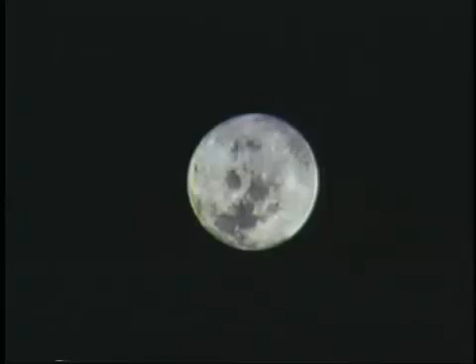The Moon, our only satellite. Barren and void of oxygen and life, where temperatures on its surface range from a blistering 230 degrees Fahrenheit to a frozen minus 290 degrees at night. Here, there is no weather, no wind. It is serene, still, unchanged for millions of years.

Beyond it, the Earth, surrounded by a thin gaseous layer, its surface often remains hidden beneath the ever-changing veil of clouds. This layer of gases protects the Earth from harmful solar radiation, limits the temperature extremes, and contains the weather that scars and molds the features of its surface.

On Earth, there is never such a thing as no weather, and the rate at which our atmospheric conditions change can be dramatic. As pilots, we must become attuned to the atmosphere and the weather it contains. Since the air is our medium of movement, understanding weather phenomena and the forces behind them are important considerations.

The atmosphere that surrounds the Earth is relatively thin. Although it extends several hundred thousand feet into space, about half of the total atmosphere is compressed below 3.5 miles. Many people have the false impression that the atmosphere is mostly comprised of oxygen, but in reality, only 21% of the total gas is oxygen.

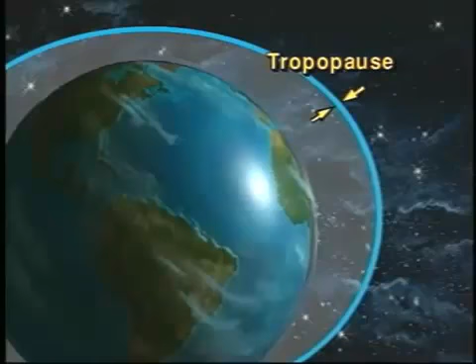Above the troposphere is a thin layer known as the tropopause, which acts as a lid on the troposphere, keeping most of the moisture within the layer below. The stratosphere extends to about 22 miles above the surface. The air within this layer is very dry and stable. Few cloud formations penetrate into this layer.

Above the stratosphere are the mesosphere and the thermosphere. These layers have very little effect on the weather.

The gases in the atmosphere contain molecules that are constantly in motion. As the air is heated, these molecules speed up, creating more space between them. The result is fewer molecules per given volume of air. When the air is cooled, the molecules become less active, meaning more can exist in a given volume of air. This cooler air is heavier and denser than the warmer air. The differences in air density are the basis for the movement and circulation of the atmosphere.

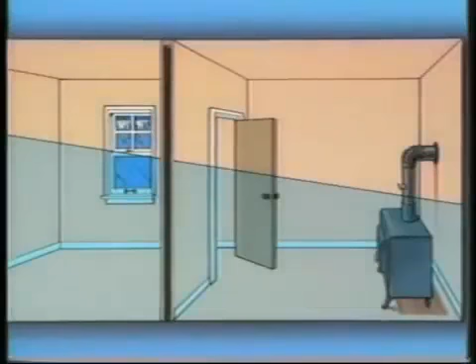To demonstrate this principle, suppose we have two rooms, one which contains cold, dense air, while the other has warmer, lighter air. When the door is opened, the air begins to mix. The heavier, colder air slides under the warmer air, creating a cold draft on the floor. As the cold air fills the bottom of the room, the warmer air replaces the colder air. On a larger scale, the draft created between the rooms is called wind.

Air replacement due to these density changes drives our major weather systems. This density difference is due to the pattern of global heating.

At the equator, light from the sun strikes the surface at an almost perpendicular angle. Near the poles, the surface of the Earth is largely turned sideways to the sun. This results in more atmosphere between the sun and the Earth at the poles. This greater amount of atmosphere cuts down the intensity of the sun's rays. Also, the same amount of light that would cover a given area on the equator is distributed over a far larger area at the poles. The result is less heating energy per square mile.

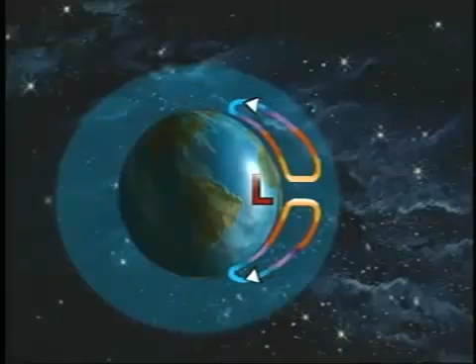As the sun's radiation heats the tropical areas of the Earth, the air becomes less dense and rises. Because less dense air does not exert as much pressure, a permanent low-pressure area forms near the equator. Nearing the top of the troposphere, the warm air is displaced sideways, away from the equator. The air continues northward and southward, slowly becoming cooler until it begins to descend near the poles. This colder descending air creates a permanent high-pressure area near the poles. The air then returns along the surface, back toward the equatorial areas, to replace the rising air.

If the Earth didn't rotate, there would be a continuous circulation pattern from the polar highs to the equatorial low. But because it does, this theoretical one-cell circulation pattern becomes a three-cell pattern. In this circulation pattern, the air near the equator still rises and flows toward the pole. But this branch, known as the Hadley cell, only reaches about 30 degrees north. Here it combines with sinking air from the Ferrel cell that corresponds with a semi-permanent subtropical high-pressure area.

Near 60 degrees north, the warm surface winds of the Ferrel cell and the cold winds of the polar cell collide, rising to produce an area of low pressure. In addition, these airflow patterns are affected by Coriolis force.

In order to better explain how Coriolis works, let's use the example of two ball players attempting to play catch on a merry-go-round. As the pitcher throws the ball, it travels in a straight line, but not to the catcher. To the thrower's perspective, some force seems to be turning the ball to the right.

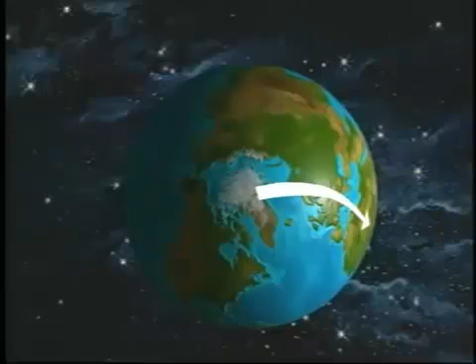This same situation applies to air as it flows from the North Pole to the equator. Because of the Earth's rotation, the wind seems to be deflected to the right. This apparent rotation is called Coriolis force.

Atmospheric pressure, or the concentration of air molecules over a given area, is measured in terms of inches of mercury, or millibars. 1 inch of mercury is equivalent to approximately 34 millibars. The measurement of pressure is done with the use of a barometer.

This instrument is nothing more than a partial vacuum within a glass tube containing mercury. As the pressure of the air exerts a force on the container of mercury, the mercury will rise. The average atmospheric pressure of the Earth will make the mercury rise 1,013.2 millibars, or 29.92 inches. This measurement is considered to be standard pressure.

During periods of higher atmospheric pressure, the force exerted upon the mercury is greater, which forces the mercury to rise. The reverse happens during periods of lower than standard pressure.

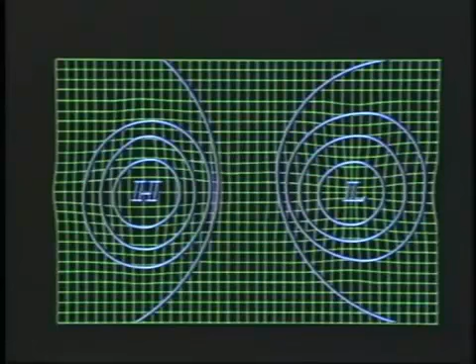As we rotate the image to a top view, we can draw lines around the areas that appear to have the same height, or in this case, the same amount of atmospheric pressure. These lines are called isobars, and they are drawn on weather maps to represent areas of equal pressure. By using these lines, you can determine the position of high and low pressure areas. You can also tell how large or severe they are by the number of lines and how they are placed.

Notice how the isobars are closest together directly between the high and the low. The closer the lines, the stronger the pressure gradient.

Air from a high-pressure area will flow directly toward a low with a force which relates to the pressure gradient. If the Earth didn't rotate, highs and lows would exchange wind directly in this manner. However, Coriolis force from the rotation of the Earth is also acting on these systems.

As winds spill off a high-pressure area in the northern hemisphere, they are deflected to the right. This results in a clockwise flow around a high and a counterclockwise flow around a low.

As the wind is driven around these systems, the air closest to the surface is slowed by the friction of the ground. When this happens, the Coriolis force is diminished until the pressure gradient force becomes greater. The resulting wind tends to flow across the isobars toward areas of lower pressure.

At altitude where airflow is not affected by the surface friction, the wind continues to flow parallel to the isobars.

In addition to creating large patterns of wind around highs and lows, differences in atmospheric density can cause wind flow on a local level as well.

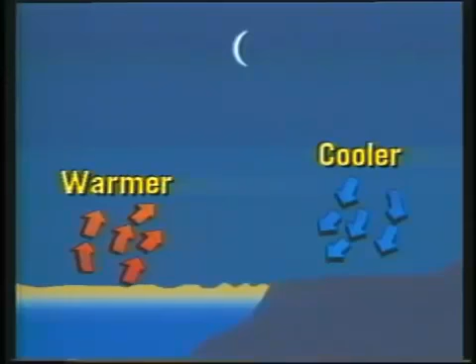During the night, the land cools very quickly. The air above the landmass begins to cool and sink. The ocean, now warmer than the land, begins to warm the air above it, causing the air to rise. The flow of the cycle now reverses, and in the evening, a land breeze will be experienced.

Local wind patterns can also form as the result of mountainous terrain. One of these is a foehn wind, which occurs when there is a mass of cold, dense air near the top of a mountain range.

As the air pushes over the top of the range, the cold air begins to descend down the other side. As this air accelerates and replaces the warmer air beneath it, it begins to compress and warm up. As the air heats, it will eventually become warmer than the air it is replacing. This causes the atmosphere at the bottom of the hill to become warmer.

These winds can become very strong, with gusts exceeding 120 miles per hour. In the Rocky Mountains, they are called Chinooks. In the Sierra Nevada mountains, they are the Santa Ana winds.

Regardless of their names, these winds can produce large amounts of damage and are hazardous to aircraft, both in the air and on the ground. They can occur during what would normally be perfectly good VFR weather, and is one of the reasons surface wind reports are important to you when receiving a weather briefing.

We have seen how heating and the differences in air density can produce wind. The other major force in the formation of weather is moisture. Moisture occurs on our planet as a solid, a liquid, and a gas. Within these states, it can take many forms.

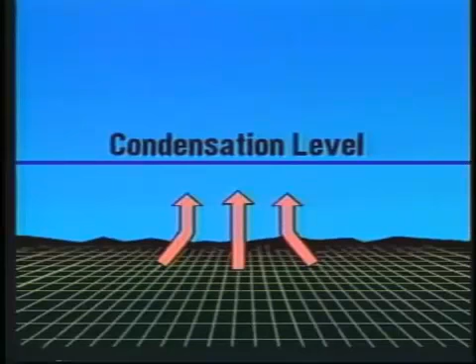Originally, the air begins to rise through a force such as the sun heating the surface, which in turn warms the air above it. As this warm air cools and eventually condenses, the latent heat released from condensation will, under the right conditions, continue or increase the strength of the updraft. If this process continues, a thunderstorm can develop.

In vapor form, molecules of water exist between other molecules contained in the atmosphere. When the air is warm, more room exists between the molecules of air. Therefore, more water molecules can squeeze between the air molecules. When the air is colder and the air molecules are closer together, less water vapor can fit between the already close air molecules. For this reason, cold air cannot hold as much water as warmer air.

Dew point is the temperature at which an air mass becomes completely saturated with water vapor. In other words, it will hold as much water as the temperature will allow. When an air mass becomes completely saturated, condensation occurs.

Let's say that we have an air mass with a temperature of 55 degrees Fahrenheit. If the dew point is also 55 degrees, then the air is 100% saturated. If condensation nuclei are present, then condensation will occur.

Clouds, fog, and dew are all forms of condensation. When water that is formed on the condensation nuclei becomes too heavy for the atmosphere to support, then precipitation occurs.

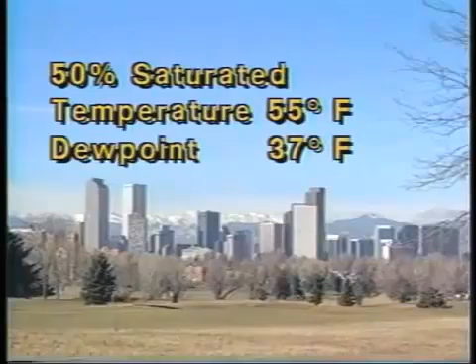Since the moisture content in an air mass is relatively constant, the air mass must usually undergo some form of cooling in order for condensation to occur. For example, if the air is 50% saturated at 55 degrees, then the air must be cooled to about 37 degrees in order for condensation to occur. When the temperature reaches 37 degrees, this air mass will be 100% saturated.

Weather is something that we must deal with daily as pilots. It is constantly changing and infinitely complex. Knowing the basic driving and manipulating forces of our Earth's weather patterns will help you to understand the more detailed conditions and concepts that will be introduced in the following weather sections. Being able to understand the concepts of weather development will not only help you understand the current conditions, but will also help you anticipate future changes as well.

It looks like it's going to be a cold one today. An Arctic cold front moved into our area around 3 this morning and has already dropped 3 to 4 inches in some parts of the city. The air mass associated with this front is stable, and with all the moisture being pushed up from the Gulf, we're in for snow the rest of the day and possibly tomorrow.

Every day, all over the world, people are dealing with the effects of the weather. In the previous section, we saw how the forces of air density, Coriolis, temperature, and moisture worked independently of each other. In this section, you'll see how they interact to produce the weather phenomena we see every day.

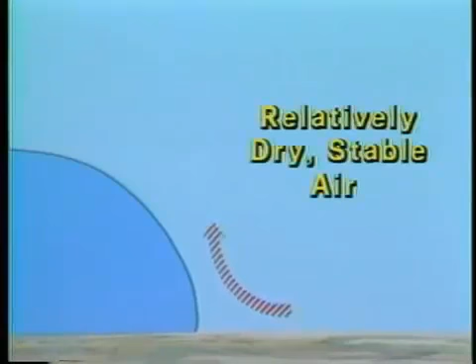As a cold front moves, it replaces warmer air at the surface. Since colder air is denser, it pushes the warmer air aloft. If this warmer air is relatively dry and stable, stratiform clouds form in the vicinity of the advancing cold front. If the warmer air is relatively moist and unstable, cumuliform clouds may form along the front.

A rapidly moving cold front can create thunderstorms many miles ahead of the frontal boundary. A line of these thunderstorms parallel to the front is called a squall line and can contain violent weather. The thunderstorms in a squall line can grow to 65,000 feet and can be especially violent. These storms often produce heavy rain, large hail, and even tornadoes.

In contrast to a fast-moving front, the slope of a slow-moving cold front is not as steep and the lifting action is not as great. Therefore, the weather is less severe.

When a warmer air mass overtakes a colder one, a warm front exists. Because of the difference in relative densities, the warm air will slowly slide over the colder air. This can result in very little vertical air movement. If enough moisture is present and the warmer air mass is relatively stable, stratiform clouds usually form. These clouds may extend for many miles ahead of the front.

However, there may be some cumulus clouds present in the form of embedded thunderstorms if unstable air is present. The weather associated with a warm front usually includes low ceilings, fog, and a subsequent reduction in visibility.

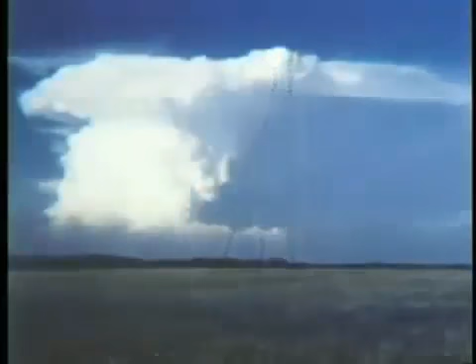The dissipating stage begins when the cell becomes predominantly downdrafts. During this stage, the intensity of the precipitation decreases. It is also during this stage that the upper-level winds often blow the top of the cloud downwind, giving it an anvil appearance. However, this does not necessarily mean that the storm is over. Severe weather could continue well after the anvil forms.

While thunderstorms usually have similar physical features, they can differ in intensity, degree of development, and associated weather. Lightning is one of the weather hazards that always accompanies thunderstorms. Other hazards might include heavy rain, hail, turbulence and gusty surface winds, and even tornadoes.

As you gain experience, you'll learn how weather limits your flying. But regardless of your experience, you should always avoid intentionally flying into or near thunderstorms. To do this, you must know where they exist or are likely to develop. You can determine this by checking weather reports and forecasts prior to departure and during your flight. If widespread thunderstorms are being reported, you might find it necessary to delay or cancel your flight.

If you encounter thunderstorms while airborne, you should never attempt to fly over them. These clouds can build faster than your airplane is capable of climbing. Flying below the cloud can be just as hazardous because of the extreme turbulence produced by the downdrafts. And you shouldn't try to fly around a thunderstorm unless you can maintain at least 20 miles between it and yourself. If that isn't possible, it might become necessary to turn around or fly to an alternate and wait for the storm to pass.

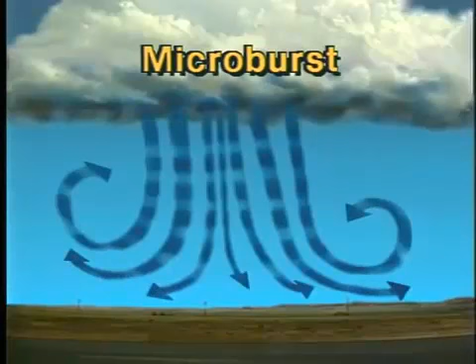One form of turbulence, called wind shear, is a sudden shift in wind speed or direction. It can occur at any altitude and in a vertical or horizontal plane. Wind shear is often associated with a more serious phenomenon called microburst. A microburst is an intense, localized downdraft which descends from the base of a convective cloud. As the air reaches the surface, it spreads out in all directions, often forming in a circular motion. This circulation creates an area of severe horizontal and vertical wind shear. A wind shear is particularly dangerous when it's in the proximity of an airport.

To show you what can happen, suppose you're taking off into a microburst. You would initially experience a headwind and an increase in performance. When the aircraft reaches the point where the wind shears to a tailwind, it experiences a severe decrease in performance, which could lead to disastrous results.

Some airports are equipped with a low-level wind shear alert system, which allows controllers to advise you of significant wind differences on the field. Whether or not this system is available, any time a thunderstorm is in the vicinity, you should anticipate the presence of a microburst. While most microbursts are associated with heavy precipitation, moisture does not have to be present.

They sometimes occur in virga, or streamers of precipitation that trail behind clouds and evaporate before reaching the ground. If there is no precipitation, a ring of dust on the ground, or trees being blown in different directions may be your only indications. Do not take off or land at an airport when you suspect a microburst exists. If you are in the air, delay your landing or divert to another airport. Most microbursts will pass over an area within a few minutes.

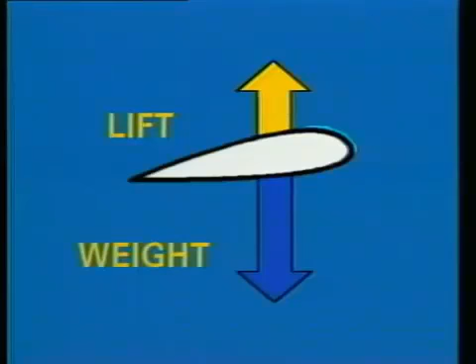Another weather hazard you should be familiar with is structural icing. Since it occurs only in visible moisture when the aircraft's surface is at or below freezing, you're unlikely to encounter structural icing until you're instrument rated. The major reason icing is dangerous is because it changes the shape of the airfoil and destroys its lift. It can also increase the weight of the airplane and restrict control movements.

Frost is a related element that you are more likely to encounter as a VFR pilot. Like icing, it can be hazardous because it interferes with the smooth airflow over the wings, resulting in a loss of lift. You should never take off unless you have removed all frost and other ice formation.

As a VFR pilot, virtually all of your flying will be done with reference to the ground. When your visibility is restricted by elements such as haze, smog, smoke, fog, blowing dust, snow, or volcanic smoke and ash, you may have problems determining your position. Fog is one of the most persistent weather hazards and is frequently the cause of surface visibilities being less than 3 miles. It can form rapidly, changing from VFR to IFR conditions in just a few minutes.

Anytime you have high humidity, a small temperature dew point spread, and light surface winds, you should anticipate fog and have an alternate course of action if it does occur.

Although volcanic eruptions are not a common occurrence, volcanic smoke and ash can pose an extreme flight hazard. In addition to reducing flight visibility, volcanic ash can cause compressor stalls and flameouts in jet engines. In piston-powered aircraft, it can also cause severe damage or engine failure. Ash clouds are most dangerous close to the volcano when an eruption has just occurred. This is due to the large amount of ash particles, hot gases, and dust.

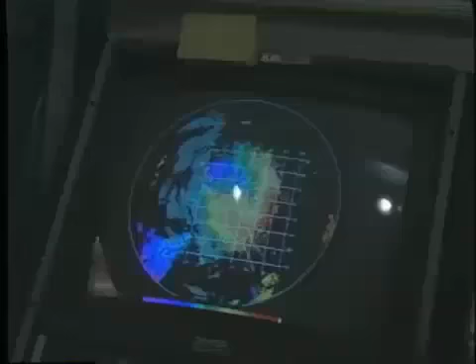Because volcanic ash is highly abrasive, control surfaces can be damaged and the pitot-static system and ventilation systems may become clogged. When volcanic material is injected into a stable atmosphere, the ash and smoke may be carried long distances by atmospheric winds. The gases and smaller particles spread out and may be very difficult to distinguish from an ordinary water or ice cloud. Currently, the National Weather Service monitors volcanic eruptions through pilot reports, radar, and satellite observations. Then, by using computer forecast models, the NWS forecasts ash cloud movements and provides subsequent advisories as required.

If you observe a volcanic eruption, notify ATC. However, do not jeopardize flight safety to make a report. Immediately take evasive action by turning upwind to avoid entering the ash cloud. Don't attempt to fly through or climb above the cloud. When you are safely away and you can make your report to ATC, provide the location and altitude of the cloud, wind direction, and a description of the ash cloud and eruption.

As you gain experience, you'll learn to recognize hazardous weather conditions. In addition, you'll learn that with proper pre-flight planning, you can avoid areas of potentially dangerous weather before you encounter it in the air. In the next volume, we'll discuss the types of information which are available to you and how to interpret them.

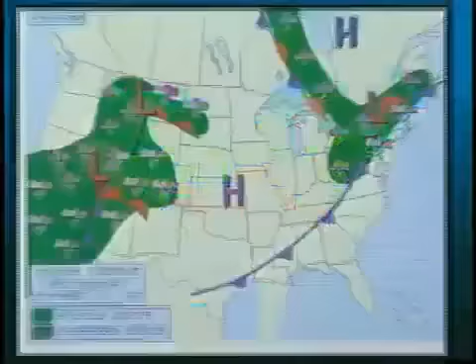The analog forecast also uses historical data for predictions. This method is useful in predicting the temperature for a given day. By combining past data for a certain day with prevailing weather conditions, a meteorologist can accurately predict the expected high or low temperature.

One of the better ways to predict the weather is the meteorological forecast. A good meteorologist can reliably forecast out to 12 hours by using his knowledge of atmospheric processes. This type of forecast can be a valuable tool for pilots.

Powerful computers and mathematical equations have increased forecast accuracy by modeling weather trends. The result is a numerical weather prediction. The computer runs one forecast model on top of another to determine their effects over time. Doing so produces a relatively accurate picture of future weather events.

Regardless of the forecast you receive, you can be sure the information contained was collected and compiled with the help of numerous agencies. With thousands of land and sea-based reporting stations, large volumes of weather data can be collected and analyzed. Through the coordinated action of several agencies, including the World Meteorological Organization, National Weather Service, and numerous private organizations, weather information is disseminated for your use.

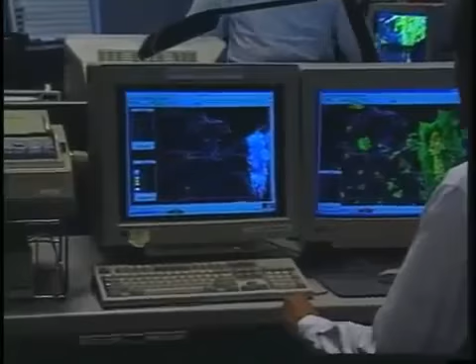Although the weather collection and dissemination network is extensive and thorough, it's not perfect. While forecasting accuracy continues to improve, long-term forecasts and short-term predictions of localized weather phenomena are still difficult to develop with reliability. Even though forecasters aren't always precise, the experience and skill they can provide you is superior to other methods of predicting the future. After all, when it comes to aviation weather, having the edge provided by a good forecast is better than taking your chances.

A weather check is not only an important part of your pre-flight planning, but is required for any flight not in the vicinity of an airport. A wide variety of weather reports and forecasts are available for pilots to use.

Today, there are several ways you can access these reports and forecasts, including a personal visit to any flight service station, computer-based weather briefings, and weather reports by fax. Since these systems allow direct access to printed weather information, learning to decode actual reports and forecasts is just as important as ever.

During this program, you'll become familiar with aviation routine weather reports, pilot weather reports, radar reports, terminal aerodrome forecasts or TAF, area forecasts, airmets, SIGMETs, convective sigmets, winds and temperatures aloft forecasts, and finally, notices to airmen or NOTAMs.

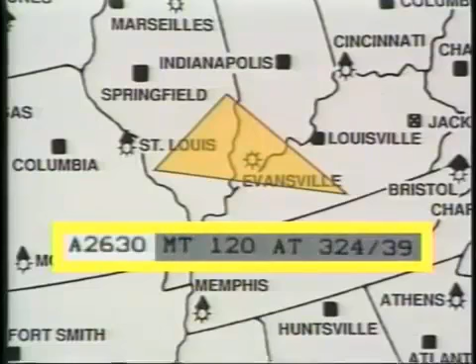The report continues by indicating that the area of precipitation is moving from 260 degrees at 30 knots. Finally, it shows that the maximum tops of the clouds are at 12,000 feet, located at 324 degrees at 39 miles.

The predicted surface weather within a 5 statute mile radius from the center of an airport's runway complex is called a Terminal Aerodrome Forecast, or TAF. Each forecast is issued 4 times a day and is valid for a 24-hour period. The codes used in a TAF are similar to those used in a METAR.

In this example of a terminal aerodrome forecast, you can find forecast wind, visibility if 6 statute miles or less, weather, and sky conditions.

Let's take a look at a typical TAF. This forecast is for KDEN, Denver, Colorado. Following the 4-letter station identifier is the date and time of issuance. The first 2 digits are the date, immediately followed by the time in Zulu. This forecast was issued on the 9th of the month at 1745 Zulu.

The next group indicates the valid period. In this case, the forecast is valid on the 9th of the month from 1800 Zulu through 1800 Zulu on the following day. The forecast is calling for winds from 220 degrees true at 20 knots.

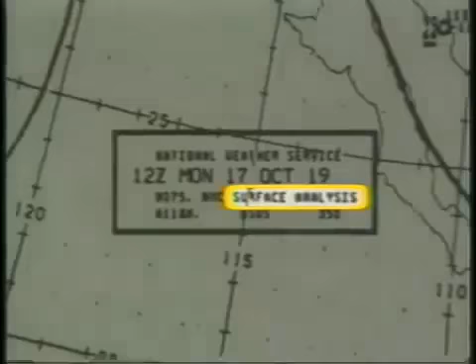The surface analysis chart is a good source for this type of information. Here, surface pressure, frontal areas, and surface weather information have been combined into a single graphic display. Low and high pressure centers are readily identifiable by large L's and H's.

Isobars, connecting points of equal pressure, are plotted around these centers. They are normally drawn at 4 millibar intervals and are labeled with the last two digits of the barometric pressure. Here, the isobar labeled 96 represents 996 millibars.

Frontal boundaries are noted by solid lines. The direction and type of front can be determined by the symbols attached to the line. The front shown here has pointed barbs on one side, which identify it as a cold front. Since the barbs are on the east side of the line, the front is moving in an easterly direction. Weather briefers may color cold fronts blue to help you identify them.

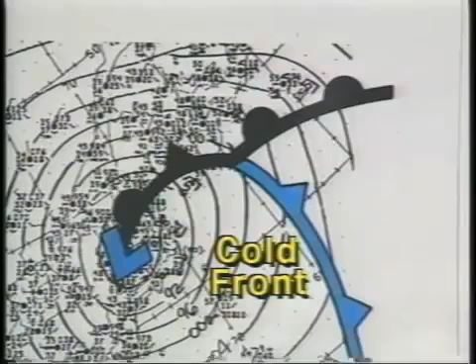Half circles identify this as a warm front. Again, the direction of movement is shown by the placement of the symbols on the frontal line. In this case, it is moving to the north. For ease of identification, warm fronts may be colored red.

A combination of half circles and barbs on opposite sides of the lines is used for a stationary front. The line is usually colored with alternating red and blue segments.

A line depicting an occluded front has both symbols on the same side and is usually colored purple.

In addition to pressure and frontal information, the surface analysis chart provides weather observations for a large number of reporting stations located throughout the country. For each location, a station model provides the reported weather conditions at the time the chart was produced. Let's take a closer look at each element of the model.

The identifier is printed below and to the left of the symbol. LAF represents Lafayette, Indiana. The circle itself is shaded according to the amount of cloud cover present. Here, 3/4 of the circle is filled, indicating a broken cloud layer.

A wind pointer indicates the true direction from which the wind is blowing. You can read the speed using the barbs at the end of the wind pointer. Each long barb represents 10 knots, while each short barb is 5 knots. In this example, the wind is out of the southeast at 15 knots.

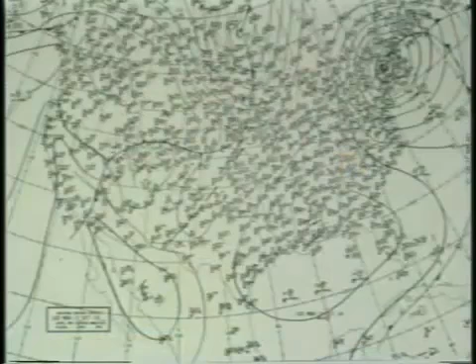To ensure that you have the latest information, you should note the time of the observation. It is shown in a date-time box in the lower left portion of the chart. Then, by comparing the current surface analysis chart with earlier ones, you can get an indication of how the weather systems are progressing.

Another graphic display of the weather is the weather depiction chart, which can be very useful in determining general weather conditions and the locations of low clouds and visibility. This chart, like the surface analysis chart, uses a station model to present the reported weather at various locations. However, this model has been simplified, making it easier to read.

Cloud coverage is shown in the same manner, but the pressure information, wind, temperature, cloud types, and station identifier are not plotted. Below the station circle is the height of the ceiling or lowest cloud layer in hundreds of feet. This station model is showing overcast skies at 10,000 feet AGL.

If the visibility is 5 statute miles or less, it is printed to the left. Weather or obstructions to visibility may also be shown. The visibility at this station is 3 miles in fog.

Although pressure and wind information is not provided on these charts, areas of significant weather are outlined to help with route planning. Shaded areas indicate IFR conditions and contain ceilings less than 1,000 feet and/or visibilities less than 3 miles. Areas of marginal VFR weather with ceilings between 1,000 and 3,000 feet and/or visibilities between 3 and 5 miles are shown in solid lines with no shading.

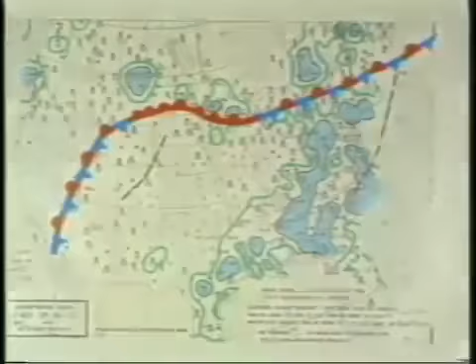The radar summary chart is another graphic display that is frequently used by pilots and briefers. It is used to identify large areas of precipitation and hazardous weather that could affect your flight.

Radar summary charts are developed by using reflected radar energy, or echoes of the precipitation areas. The more severe the precipitation, the stronger the echo. Each radar observation station is then combined into one hourly map.

The strength of the echo returns is shown by solid lines surrounding shaded areas. The outermost line indicates precipitation that is light to moderate. A second line within the echo depicts heavy to very heavy precipitation, while a third line shows where intense to extreme precipitation exists. A solid single line shows a line of echoes, with the boxed SLD indicating that the echo coverage is 0.8 or greater along the line.

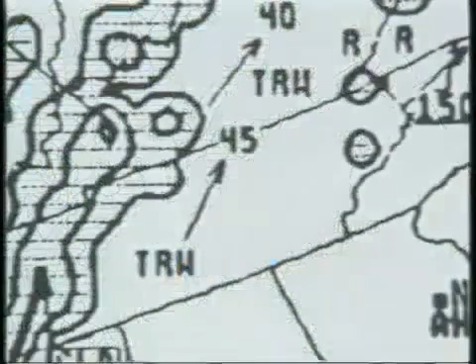The direction of movement of an individual cell is indicated by an arrow. The speed, 45 knots, is shown at the point of the arrow.

The letters NE indicate areas with no echoes, while the letters TRW stand for thunderstorms and rain showers. Echo tops are encoded in 2 or 3 digits. You will need to add 2 zeros to determine the actual altitude. For example, the top of this cell is at 34,000 feet, and the top of this one is 19,000 feet. Because it is assumed that all precipitation displayed on the chart reaches the surface, the chart does not include a symbol to show the base of the echoes.

An area which is under a severe weather watch will be marked with a dashed box and an alphanumeric identifier. In this case, WS0006 identifies this as a severe thunderstorm watch area. When an area is marked with a WT, it is identified as a tornado watch area.

When using a radar summary chart, remember that radar only detects areas of liquid or solid precipitation. It will not, for instance, show areas of fog, and the actual cloud tops may be higher or lower than the figures shown on the chart.

The charts we have seen so far in this program have all depicted observed weather conditions. Other charts, including the Low-Level Significant Weather Prognostic, or PROG chart, offer a forecast of future weather. PROG charts are divided into 4 panels. The top 2 contain 12 and 24-hour forecasts of IFR and marginal VFR conditions, turbulence, and freezing levels. These 2 panels forecast the weather from the surface through approximately 24,000 feet.

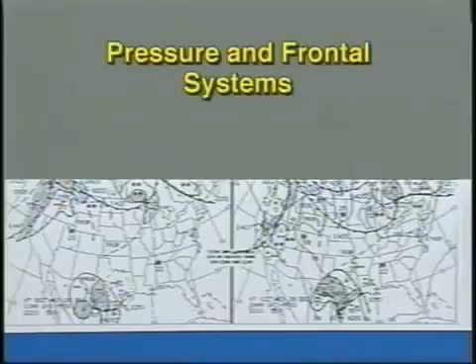The bottom 2 panels forecast the location of pressure and frontal systems, as well as the areas and types of precipitation on the surface itself.

Areas of IFR conditions, where ceilings are expected to be less than 1,000 feet and/or visibilities less than 3 miles, are enclosed by solid lines. Scalloped lines enclose marginal VFR areas where ceilings are expected to be 1,000 to 3,000 feet and/or visibilities are forecast to be between 3 and 5 statute miles.

Areas which are forecast to have moderate or greater turbulence are enclosed by dash lines and contain symbols indicating the intensity and altitude of the turbulence. In this case, moderate turbulence can be expected from the surface to 3,000 feet over this area of the United States. The position of the freezing level at specified altitudes is also shown on the chart.

A zigzag line is used to identify the freezing level at the surface. Freezing levels above mean sea level are indicated by dashed lines drawn at 4,000-foot intervals. On the lower panels, fronts and pressure centers are presented in the same manner as they are on surface analysis charts. In this example, this high has a barometric pressure of 1,022 millibars.

In previous segments, you learned how to interpret printed reports and forecasts as well as graphic weather products. But as a pilot, how does this information get into your hands? You can retrieve weather information from a wide variety of sources. Government facilities and private companies make weather reports and forecasts available by phone, television, fax, radio, and the internet. First, let's take a look at the sources of pre-flight weather information available to you.

The most common source of pre-flight weather information is the Flight Service Station, or FSS. Flight service stations are FAA-operated facilities spanning the contiguous United States as well as Alaska and Hawaii. You may encounter the term Automated Flight Service Station, or AFSS. This term is sometimes used to differentiate the current FSSs that employ advanced technology from the former non-automated FSSs.

An FSS typically offers a number of services, including pre-flight weather briefings, IFR and VFR flight plan processing, assistance for aircraft that are lost or in distress, and aid for search and rescue operations.

Some flight service stations also have the ability to provide in-flight weather information in the form of En Route Flight Advisory Service, or EFAS. If you happen to live in a city where an FSS is located, you can visit the station and receive pre-flight weather services in person if the briefers are able to handle your request at that time. Due to the limited number of stations in the U.S., however, a telephone briefing is a much more common means of receiving weather information.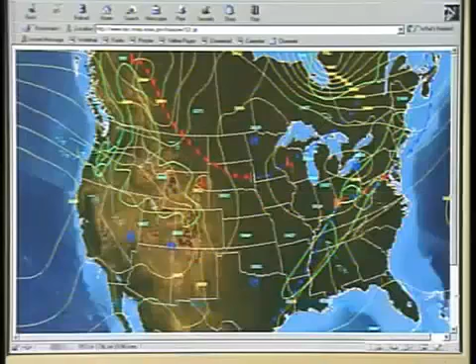In addition to DUATS, a number of organizations offer weather information by phone or on the Internet. While many of these sites and services are free, some require membership or specific user fees. Just one of many Internet sites providing weather information is the National Weather Service website, which is operated by NOAA, a weather service branch of the U.S. government. While websites are excellent sources of pre-flight weather data, the information presented may not be the most up-to-date and should not be used in place of a complete weather briefing from an FSS or the DUATS system.

Jeppesen also provides several weather resources for pilots, such as JepFax, a worldwide weather fax service available for a small user fee. A complete listing of Jeppesen weather products, including JepFax, can be found at jeppesen.com or at flightneeds.com.

Now that you've discovered where to obtain weather information prior to flight, let's explore how you can get updated weather information while airborne. One of the best sources of en route weather is En Route Flight Advisory Service, or EFAS, also known as FlightWatch. This service is available from selected flight service stations. The frequency for FlightWatch is 122.0. After giving the EFAS specialist the details concerning your flight and your request, the briefer relays the latest weather information.

You can also access weather data by monitoring selected VOR and NDB stations. These facilities normally provide local weather information updates or weather advisories. One such source of en route advisories is the Hazardous In-Flight Weather Advisory Service, or HIWAS, which is continuously broadcast over selected VORs. Information available through this system includes AIRMETs, SIGMETs, convective SIGMETs, summarized severe weather forecast alerts, center weather advisories, and urgent PIREPs. The nav aids and frequencies used for HIWAS can be found in the Airport Facility Directory. Nav aids with HIWAS capabilities are also noted on aeronautical charts.

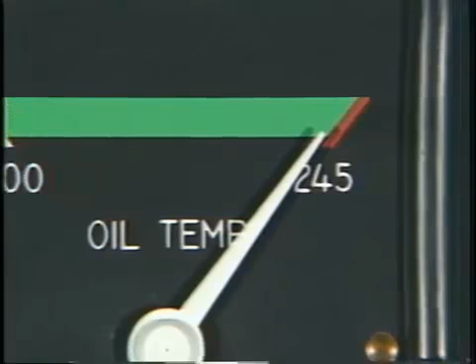Your ability to recognize conditions which can produce an emergency situation will increase with your flying experience. Whenever you feel that a potentially dangerous or unsafe condition exists, you must take the appropriate action and advise ATC. Although the steps you take will vary with the situation, the AIM establishes some guidelines.

For example, if an emergency occurs when you're operating under instrument flight rules, you should immediately inform ATC of your problem and continue squawking your assigned transponder code unless directed to change to another code. If you are unable to immediately communicate with an ATC facility, you should squawk 7700, the emergency code. If you can't establish contact, use the emergency frequency of 121.5 megahertz. Most flight service stations, radar facilities, and control towers continuously monitor this frequency for distress transmissions. If you're still unsuccessful, try contacting the nearest flight service station or ATC control tower.

If you're in a distress situation, such as a fire or structural damage, start your transmission with the signal Mayday, Mayday, Mayday. If the situation is not as critical, such as not being sure of your position or whether you can make your destination on the amount of fuel you have, you're in an urgent situation. With this type of emergency, you should precede the transmission with Pan, Pan, Pan, repeated three times.

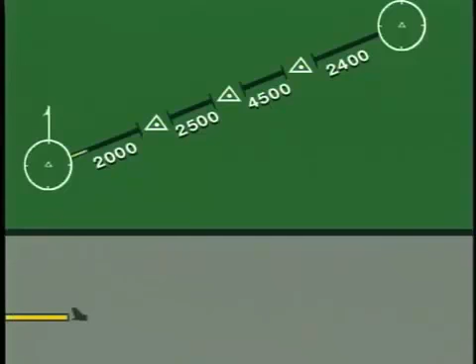If you experience communications failure in IFR conditions, you should maintain the assigned altitude of 2,000 feet to Chaff intersection. Then climb to the expected clearance altitude of 3,000 feet. At Routel intersection, begin a climb to 4,500 feet, the minimum en route altitude for this segment. After Krenz, the MEA lowers to 2,400 feet, but you shouldn't descend lower than your expected clearance altitude of 3,000 feet. Maintain this altitude to the Eufaula VOR.

Once you arrive at your destination, ATC will provide adequate traffic separation for each published instrument approach procedure serving the destination airport. You may use whichever approach you deem appropriate. However, you should not begin your approach before your estimated time of arrival. You can determine your ETA by adding the filed or amended time en route to your departure time.

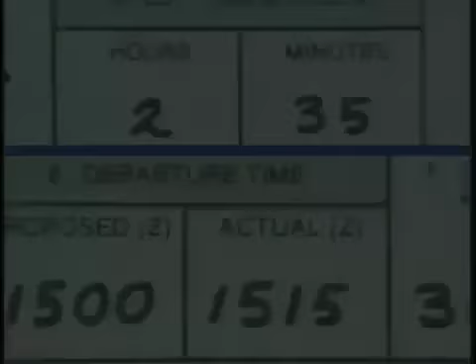The lost communications procedure just presented covers a few of the specific corrective actions required for some in-flight communications failures. You must recognize, of course, that emergency situations may be caused by other aircraft system failures or by encounters with various weather hazards. Whatever the emergency, you should always assess the problem and act accordingly in the interest of safety. Good pre-flight planning, pre-flight inspection, and attention to aircraft systems helps you prevent potential emergency situations and greatly adds to the overall safety of your flight.

Your instrument rating allows you to fly into thousands of airports, even if the weather is below VFR minimums. This rating shows that you're able to control the airplane solely by reference to instruments. However, actual IFR flight is very different from the controlled training environment of flying under the hood with your instructor by your side.

Since the demands of instrument flight impose heavy pilot workloads, especially in high-density terminal areas, you need to gather all available information when planning for and making an instrument flight.

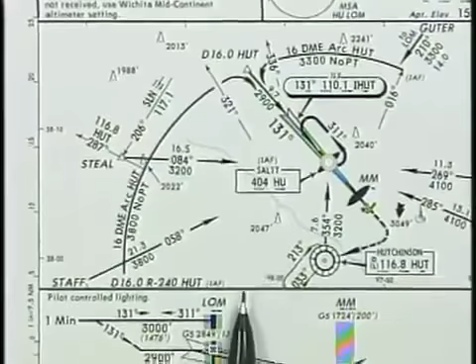Planning the approach at your destination is also an important consideration. Study each chart carefully and mentally fly the approach. This includes the arrival routes needed to transition from the en route phase to the approach, the frequencies, and the initial approach fixes. Look at the headings, altitudes, distance information, and the missed approach procedure to see if there is anything out of the ordinary and to get an idea of what to expect.

Then move to landing minimums and check the DH and MDA. Also look for any information that indicates additional equipment or special procedures, as well as timing information if appropriate. In addition, review the runway layout and runway and approach light systems.

When you examine your charts, be sure to include any possible alternates. Don't wait until you're en route to your alternate before you look at those approaches for the first time.

Situational awareness does not stop with just flight planning. It also includes such things as cockpit management. After you've completed your pre-flight inspection, take a few minutes to organize the flight material before starting the engine. This helps you locate information quickly once you're en route. Along with arranging everything in a logical order, have every item close by which you might possibly use during the flight.

Warrior 81312, cleared to the Hutchinson Municipal Airport as filed. Maintain 7000, maintain runway heading for radar vectors. Departure control 120.9, squawk 4127.

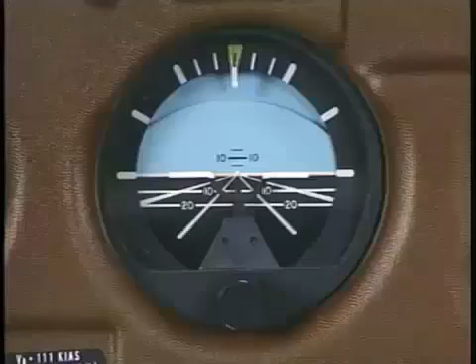An important element of the decision-making process is recognizing that a change has occurred and then determining the proper course of action. For this reason, keep track of your position and frequently include the aircraft's engine, electrical, and other systems instruments in your normal scan. For instance, by checking the vacuum indication, you'll notice if an abnormal reading occurs. This can help with the early identification of malfunctioning attitude and heading indicators.

Since part of IFR cockpit management includes finding ways to make your job easier, many instrument pilots use a headset to facilitate communications with ATC.

Warrior 312, turning left to 060.

Not only does the headset reduce the time required to initiate a communication, but it lets you talk to controllers without diverting your attention from the instruments.

Warrior 312, contact Kansas City Center on 125.2. Warrior 312, Kansas City Center on 125.2.

You might also choose to use a lap or knee board to copy ATC clearances, updated weather, and to help keep your flight material organized.

If you have one, an autopilot can significantly reduce your workload. With the system engaged, you can relax somewhat from the demands of flying the airplane. This allows you more time to review your route or the approach chart. However, when using an autopilot, make sure you monitor its performance. It is possible for an autopilot to fail or become unreliable.

Probably the most challenging and stressful element of a single-pilot instrument flight is the approach and landing. Flying into a terminal area can be fast-paced. Besides controlling the airplane, you must obtain ATIS, communicate, fly the procedure, identify nav aids, intercept radials, prepare the airplane for landing, identify the runway environment, and perform a landing.

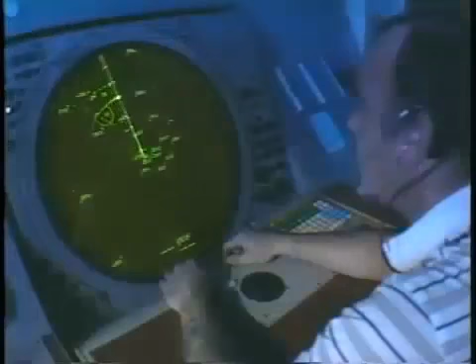For example, who will be responsible for communicating with ATC? Who will copy the clearances? And who will adjust the altimeter when you obtain a new setting?

As you can see, there is great potential for confusion that could lead to a drastic error, no matter how much experience you both have. So take the time to determine each person's responsibilities and communicate with one another to avoid overlooking an essential procedure. Just remember, as pilot in command of the flight, you are the one responsible for the airplane's operation.

As you've already learned, flying is a combination of events which requires you to make a continuous stream of decisions. During an IFR flight, you'll experience a whole new set of decisions affecting you, your airplane, and the environment. By practicing the decision-making skills and doing those things which will lessen your workload while flying, you will enhance the safety of your flight.

Up to this point, you've learned most of the skills required to fly the aircraft solely by reference to the instruments. Soon, you will be ready for your first IFR cross-country flight.

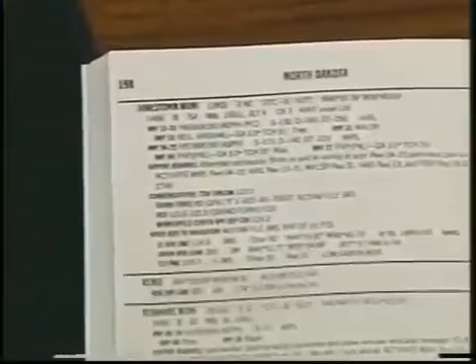Referring to the Airport Facility Directory, check the listings for the destination and alternate airports for such things as fuel availability, services, and special airport precautions. For example, at Jamestown, the airport is attended continuously, and you should be alert for birds on and in the vicinity of the airport. Before your flight, you may also want to brush up on ATC procedures by reviewing the Aeronautical Information Manual. Although it is not necessary for every flight, it is a good practice to periodically review the AIM to keep abreast of any recent changes.

The morning of the flight, you should call the flight service station for a standard weather briefing to determine if the weather has improved as forecast. The briefing reveals that the expected improvement in conditions did not occur. IFR weather still dominates eastern North Dakota and Minnesota. Miles City is currently reporting good VFR weather with 10,000 scattered and 30 miles visibility. Dickinson is reporting 6,000 broken and 15 miles visibility. Bismarck is currently IFR with a 2,000-foot overcast and 2 miles visibility.

At Jamestown, your destination, the last reported weather was 700 overcast and 2 miles visibility, with surface winds from 310 at 6 knots. Winds aloft for the route are generally westerly at less than 10 knots through 12,000 feet for Montana and western North Dakota, and light and variable through 12,000 feet for eastern North Dakota. NOTAMs indicate that the Jamestown ILS runway 31 glide slope is out of service.

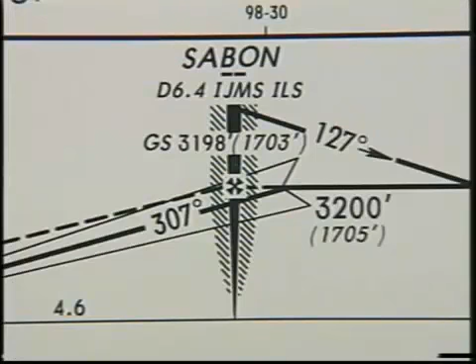Since the glide slope is inoperative, you'll begin your descent at the final approach fix, which is Sabon outer marker, or the 6.4 DME fix of the Jamestown localizer, not the VOR. The MDA for this approach with the glide slope out will be 1,880 feet.

You will probably fly the approach at a ground speed of 70 knots. That means you'll be at the missed approach point 4 minutes 22 seconds after passing the final approach fix. You can also identify the missed approach point when you're at Jamestown localizer's 1.3 DME fix.

If you don't have the runway environment in sight at that time, you'll perform a missed approach, which is to climb to 3,200 feet, then make a right turn and proceed direct to the Sabon LOM and hold. Then, depending on the weather conditions, you'll either request another approach or request a clearance to your alternate.

You might also want to look at the other approaches at Jamestown to see if there's anything unusual which might cause you a problem. By visualizing the flight before you actually get in the airplane, you've formulated a plan of action, which should make the flight easier, safer, and less stressful.

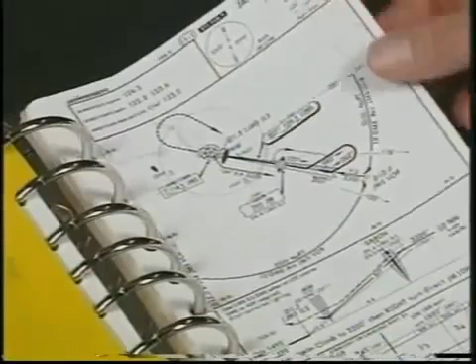As you have seen, a good planning sequence is important for any IFR flight. Development of good IFR planning skills can eliminate disorganization and assist you in your in-flight decision-making. With a good route choice, an understanding of the weather, and a knowledge of the factors that could affect your flight, you will not only save time and money, but will greatly reduce the possibility of an unpleasant surprise during your trip.

As you progress in your flying, you will probably be exposed to more sophisticated aircraft, and along with these sophisticated aircraft come advanced systems. For example, high-performance aircraft may be equipped with fuel injection systems, turbochargers, constant speed propellers, advanced environmental control systems, de-icing or anti-icing systems, and retractable landing gear. In this presentation, we'll look at these systems in detail and provide you with a basic understanding of each one.

Since the specific operating procedures for each system vary from one manufacturer to another, you should always consult the pilot's operating handbook or aircraft flight manual prior to operating any unfamiliar system.

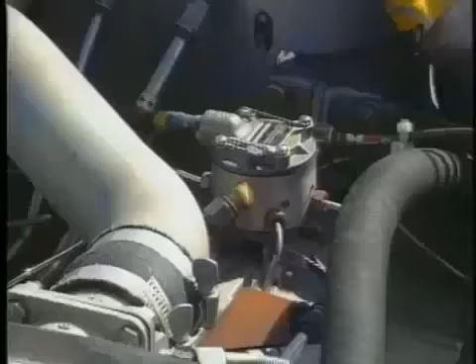This allows for an even distribution of fuel to the cylinders and a more uniform mixing of the fuel and air. Let's quickly look at the components of a typical fuel injection system.

The first component that we'll look at is the auxiliary or boost pump, which is usually an electric pump and serves several purposes. Its primary function is to pressurize the injection system prior to engine start. This forces fuel through the lines. The auxiliary pump also maintains fuel pressure in the event the engine-driven pump fails.

The next component is the engine-driven fuel pump. Once the engine is started, this pump pressurizes the system by taking fuel from the tanks and sending it to the fuel injector unit. In some systems, the fuel pump supplies more fuel than the injector unit needs. In this case, the excess fuel is routed back to the tank through a return line. In other systems, the fuel is strictly metered and no return line is required.

After the fuel is pressurized by the fuel pump, it moves into the fuel injector unit. Here, valves meter the fuel according to the mixture setting and the flow of air into the engine.

The metered fuel is then sent to the fuel flow divider, or fuel manifold, which is located on the top of the engine. It's designed to divide the fuel evenly between each of the fuel injection nozzles.

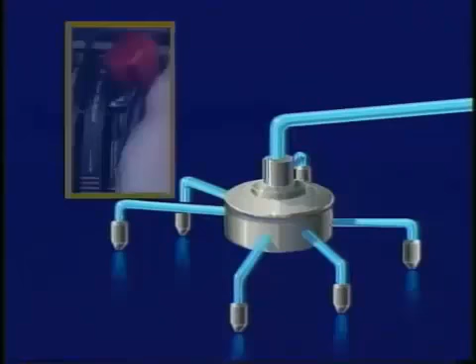After the metered fuel leaves the flow divider, it's injected into the engine through the injector nozzles located on each cylinder head. At this point, the fuel is mixed with the air in the induction manifold just outside the intake valves and combustion chamber.

A fuel flow indicator, calibrated in pounds or gallons per hour, is connected to the outlet of the flow divider. It measures the pressure being applied to the discharge nozzles.

Now that you're familiar with the basic components of a fuel injection system, let's look at some of the advantages fuel injection has over carburetion. As mentioned earlier, one advantage of fuel injection is the even distribution of fuel to each cylinder. Let's look at why this is beneficial.

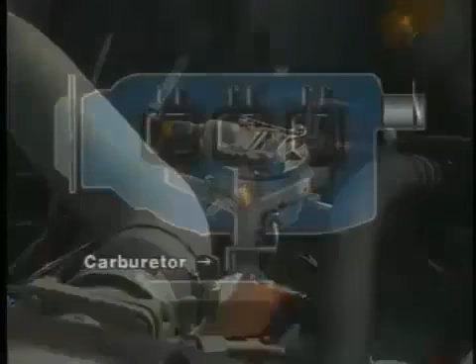On a conventional carburetor system, the metering and vaporization takes place at the beginning of the induction system. Notice how the center cylinder is closer to the carburetor than the cylinders at each end. This results in an uneven distribution of the fuel-air mixture.

The ideal solution for this would be to have a carburetor at each cylinder. This is what a fuel injection system does. The injection nozzle acts just like a little carburetor, delivering equal amounts of fuel to all cylinders.

This allows for a smoother running engine with more horsepower for the same amount of fuel. In addition, the engine will operate at lower temperatures. This decreases the chance of experiencing detonation or pre-ignition and increases engine life and reliability.

Another advantage of fuel injection is that it is not susceptible to carburetor icing. Float-type carburetors are highly susceptible to icing due to where vaporization occurs.

As intake air passes through the venturi, it cools. Further cooling occurs during the vaporization process. This drop in temperature can cause moisture to freeze and adhere to the internal parts of the carburetor.

In a fuel injection system, there is no significant temperature drop across the throttle valve, so icing is unlikely. In addition, the fuel is vaporized at the cylinder head, where increased temperatures make icing virtually impossible.

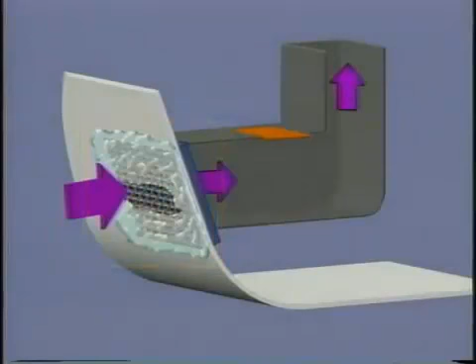One place where ice can accumulate in a fuel injection system is on the air intake. If this happens, all air could be cut off to the engine, causing it to quit.

To prevent this from happening, some induction systems have an alternate air door. When opened, air from inside the cowling is taken into the induction system. Although this allows the engine to keep running, the reduced airflow and increased temperature affects the amount of power the engine can produce, much like the effect carburetor heat has on a carbureted engine.

Although it may sound like fuel injection is the perfect system, it does have some drawbacks, the most significant being the increased possibility of vapor lock.

Vapor lock occurs when vaporized fuel blocks the flow of liquid fuel to the fuel injection system. The reason fuel injection systems are more likely to experience vapor lock is because there are more fuel lines in close proximity to the engine and the heat it produces. If temperatures are hot enough, the fuel inside the lines vaporizes, resulting in low fuel pressure or engine failure due to fuel starvation.

Fuel-injected airplanes that are flown frequently with only short stops between flights are highly susceptible to vapor lock. This is because some of the heat given off by the engine is absorbed by the fuel lines, causing the fuel to vaporize. Vapor lock can usually be remedied by turning on the auxiliary fuel pump and forcing cooler fuel through the system.

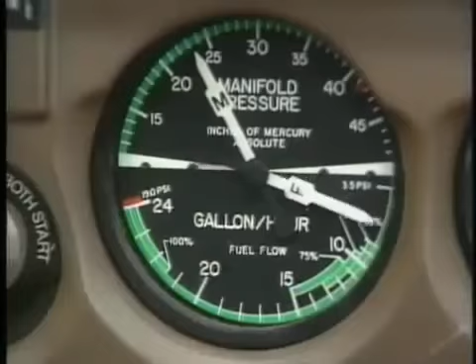The last topic we'll discuss is starting procedures. Although starting procedures vary between manufacturers of fuel-injected engines, all of them have one thing in common: if the engine is cool to the touch or being started for the first flight of the day, the system will have to be primed. This is accomplished with the auxiliary fuel pump. With the throttle and mixture set according to the POH, turn on the electric fuel pump and monitor the fuel flow indicator. When a sufficient fuel flow rate is noted, continue with the specified starting procedures.

A common area of difficulty with fuel injection is starting a hot engine. As mentioned earlier, hot engines cause fuel in the fuel lines to vaporize. Again, the auxiliary fuel pump is used to purge the system of the vapor lock. When doing this, make sure you follow the manufacturer's procedures to reduce the chance of flooding the engine and possibly starting a fire.

Another aircraft system that helps increase performance is turbocharging. Let's take a look at how turbocharging works and discuss some of the unique characteristics of operating an aircraft equipped with a turbocharging system.

As you know, when you climb, the ambient air pressure decreases approximately 1 inch of mercury for every 1,000 feet. This means there is less air available for combustion at higher altitudes. Because of this, normally aspirated engines are not able to produce maximum manifold pressure with an increase in altitude.

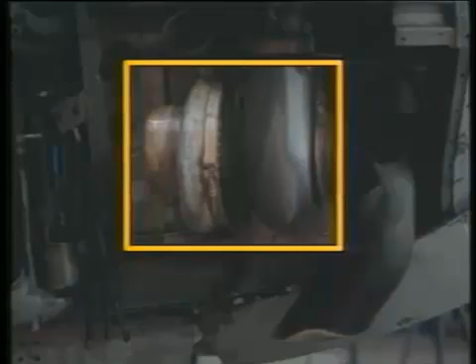In order for a reciprocating engine to overcome this problem, turbochargers were installed as a means of getting more air into the engine. With a turbocharger, intake air is compressed before it enters the combustion chamber. This allows the engine to obtain higher manifold pressures, which equate to increased engine output.

To better understand how a turbocharger works, let's take a brief look at the components of a typical system. There are 3 components common to all turbocharging systems: the compressor, the turbine, and the wastegate.

As air enters the intake, it passes through a compressor where it is compressed by the centrifugal force created by the impeller blades. The compressed air is then routed from the ring surrounding the impeller through the throttle body to the cylinder. The compressor is driven by a turbine which is propelled by the engine's exhaust.

If all of the exhaust from the engine were allowed to pass through the turbine at low altitudes, the compressor would produce excessive manifold pressure and high operating temperatures. To alleviate this, a wastegate is added to the system to control the amount of exhaust gas routed through the turbine. When the wastegate is open, most of the exhaust bypasses the turbine.

In this situation, the engine operates much like a normally aspirated engine. When the wastegate is closed, all of the exhaust gas is used to spin the turbine. In this case, the maximum amount of compressed air is being delivered to the manifold.

In some turbocharged engines, the wastegate is controlled by a pressure-sensing controller mechanism and a wastegate actuator. Once the manifold pressure is set on this type of system, the wastegate position adjusts automatically to maintain the desired power output. On less complex systems, the position of the wastegate is regulated by throttle movement.

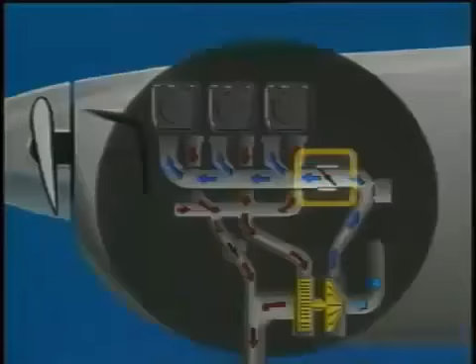When the throttle is moved forward, the wastegate moves to the closed position. When operating this type of system, you must give close attention to throttle operations, since excessive manifold pressures can be produced at low altitudes. For specific operating procedures on the turbocharging system you're using, consult the pilot's operating handbook or aircraft flight manual.

An area you need to be familiar with before operating a turbocharged engine is critical altitude. This occurs when the wastegate is completely closed and the turbine is spinning at its highest speed. Once the critical altitude is reached, manifold pressure will decrease with an increase in altitude, just like a normally aspirated engine.

Another concern for turbocharged engines is the shutdown procedure. After a flight, the turbine may still be spinning at several thousand RPM. When you shut the engine down, the oil supply to the turbine is cut off. Therefore, before shutting the engine down, allow the turbine a chance to spool down with oil being supplied to it by idling the engine for the time specified by the manufacturer.

When you get into a high-performance aircraft for the first time, one of the differences you'll probably notice is the propeller pitch control next to the throttle. As you will soon learn, this control is used to vary the propeller blade angle to gain additional performance and efficiency from small, lightweight aircraft engines.

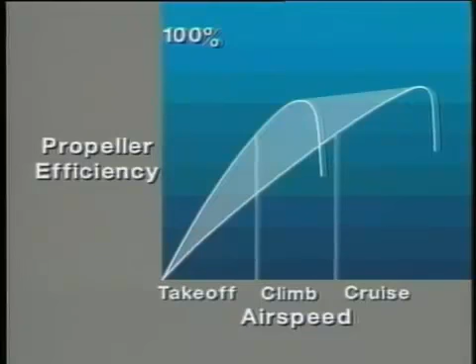Before we get into the operational considerations of constant speed propellers, let's briefly examine the components of a typical system. These include the throttle, the propeller or prop control, the governor, and the propeller itself.

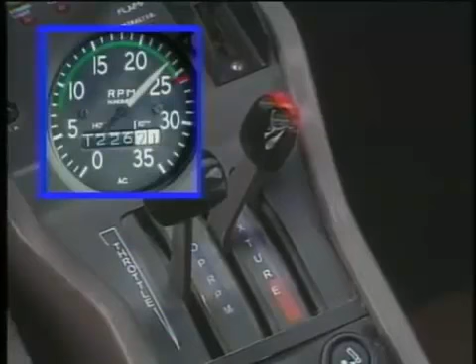When oil is released from the hub, aerodynamic forces acting on the blades of the propeller will twist the blades to a low pitch.

Now that you're familiar with the components of a constant speed propeller, let's take a moment to examine how these components work to control a propeller's pitch. When you set the prop control, you're actually setting the spring tension in the governor to maintain a desired RPM. With the tension set, the system remains in a state of equilibrium until the aircraft accelerates or decelerates.

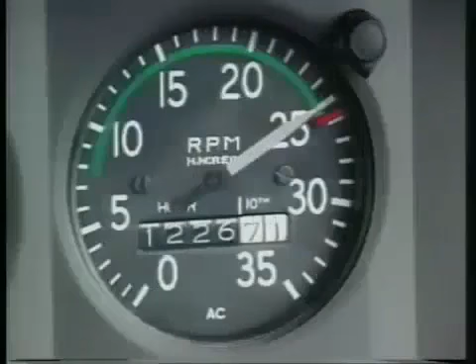It's important to note that as propeller RPM decreases, manifold pressure increases slightly. Therefore, to avoid excessive manifold pressure for a given RPM, it's best to initially reduce the manifold pressure below what is desired. Then, after the RPM is set, adjust the throttle to the desired setting.

When increasing power on an aircraft with a constant speed propeller, begin by increasing the RPM, then advance the throttle. Constant speed propellers can give you better climb rates, higher cruising speeds, and extended endurance due to reduced fuel consumption. However, since the combination of manifold pressure and RPM setting needed to achieve a specific performance varies from one aircraft to another, always consult the pilot's operating handbook for the recommended power settings.

So far, we have looked at how fuel injection, turbocharging, and constant speed propellers can increase engine performance. But as you extract more from the engine, it becomes more and more important that we observe the operating limitations and follow the procedures established for the aircraft by the manufacturer.

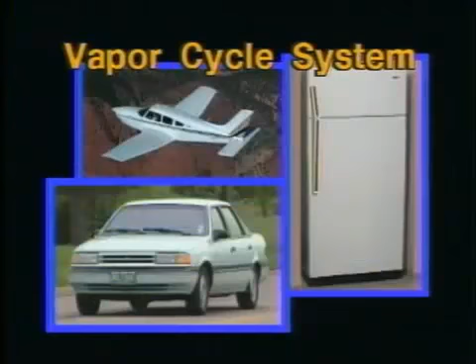The most common type of air conditioner found on general aviation aircraft is a vapor cycle system. These systems are very similar in operation to the systems found in an automobile or refrigerator. To activate the system, controls are provided in the cockpit. Normally, these controls include an on-off switch, a thermostat control, and a fan control.

When the system is turned on, a compressor compresses Freon vapor and sends it to a condenser, which is exposed to the free airstream. Here, the Freon cools and turns into a liquid. Then the Freon goes to a receiver dryer, which acts as a reservoir to ensure there is enough coolant available to meet system demand. In the receiver dryer, the Freon goes through a filter dryer.

The filter removes contaminants, while the dryer contains a material that attracts and removes moisture, which could freeze in the refrigeration system and plug the line. The Freon then goes to an expansion valve where the pressure is reduced. This further cools the liquid.

From there, the Freon goes to the evaporator, or heat exchanger. Here, the liquid Freon changes to a vapor. Cabin air is then passed through the evaporator. Since the cabin air temperature is warmer than the temperature of the vaporized Freon, the Freon absorbs heat from the cabin and makes it more comfortable to you and your passengers. Finally, the vapor is returned to the compressor and the cycle starts over.

For winter flights or flights in colder temperatures, a cabin heater is often more essential than an air conditioner. There are two basic types of heaters: the heat exchanger and the combustion type.

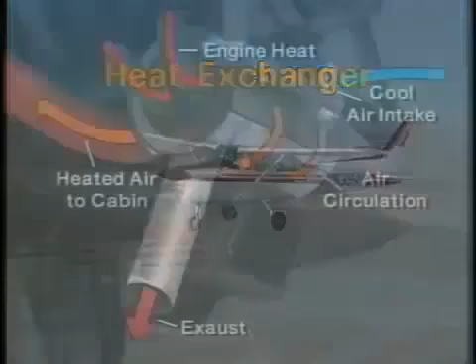The first one we'll discuss is the heat exchanger, which is commonly found on single-engine airplanes. These systems pass cool ambient air through a shroud surrounding a hot component in the engine compartment, usually the exhaust system. This heats the air, which is then vented to the cabin.

One danger associated with this type of system is the possibility of carbon monoxide leaking into the heating system through a defect in the exhaust system. Carbon monoxide can quickly and severely reduce your flying ability and can even cause death. If you suspect a leak or smell exhaust fumes in the cockpit, turn off the heater, open the fresh air vents or windows, and use supplemental oxygen if it's available.

The other heating system is the combustion type, which is like the gas furnace in most homes. This type of heater is commonly found on multi-engine airplanes because the location of the engines makes heat exchangers inefficient and impractical.

This system uses a blower to force hot air from the combustion heater to the cabin. Although combustion heaters operate independent of the engines, they rely on the same fuel supply. Therefore, you should plan on increased fuel burn and decreased range when using this type of heater.

If the heater overheats, an overtemp switch shuts the heater off to prevent a possible fire. In most aircraft, this overtemp switch cannot be reset from the cabin. Therefore, you'll have to continue the flight without heat, or land and reset the system. However, before flying again, make sure you've determined and corrected the malfunction.

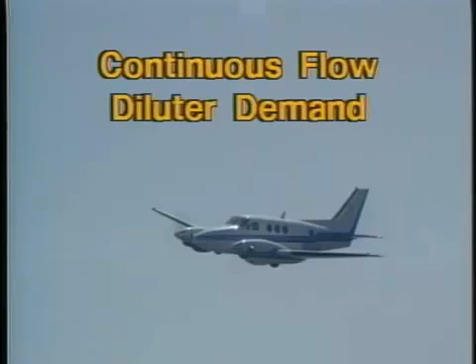There are three types of oxygen systems: continuous flow, diluter demand, and pressure demand. The first one we'll look at is the continuous flow system. This system is commonly found on general aviation aircraft and can be portable or permanently installed.

Whether permanent or portable, the continuous flow system has four basic components: a high-pressure supply cylinder, a pressure regulator, a distribution system, and a continuous flow mask assembly.

The oxygen supply is stored in one or more high-pressure cylinders. These cylinders must comply with strict quality standards and labeling practices. These labels identify the cylinder as containing aviators breathing oxygen, the date of the last hydrostatic test, and the highest pressure the tank can be charged to. Normally, this is 1,800 pounds.

A gauge displays the pressure in the cylinder, while the on-off valve is used to start oxygen flow. On portable units, the gauge and valve are on the tank, while permanent installations often have these controls in the cabin.

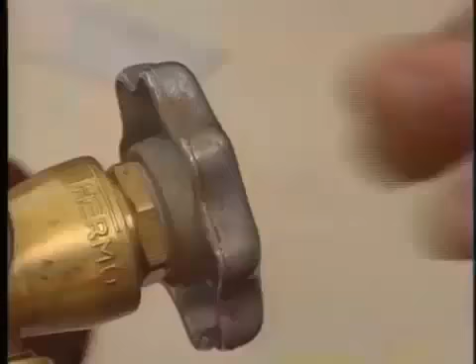A pressure regulator reduces cylinder pressure to a usable level. This regulator may be manually operated or automatic. A manual regulator works the same as a water faucet. Opening the valve increases flow. The disadvantage of a manual regulator is that you must readjust it as you're changing altitude.

With an automatic regulator, all you have to do is activate the system with the on-off valve. The system then compares the atmospheric pressure and cylinder pressure and adjusts the flow accordingly.

In aircraft with permanent installations, oxygen outlets are located in various places throughout the cabin. Each outlet has a spring-loaded check valve to prevent oxygen leaks and allow oxygen to flow only when a mask is plugged into the outlet.

The mask assembly for a continuous flow system consists of the plug-in connector with the flow restrictor, a supply hose with a flow indicator, a rebreather bag, and the mask itself.

The plug-in connector has different size openings depending upon who will be using the mask. A larger opening connector is used by pilots and crew since they require more oxygen than the passengers. These connectors are usually color-coded with the passenger's supply hose marked with the gold or orange band. The pilot supply hose is marked in red.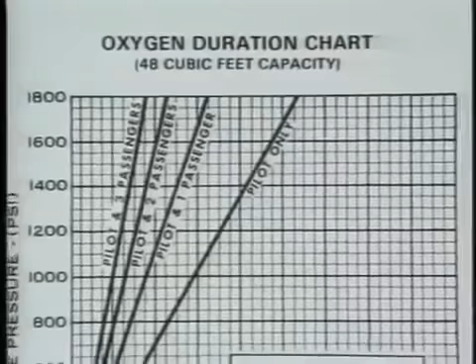Regardless of the type of oxygen system installed in your aircraft, it's very important to have a sufficient supply of oxygen available for the planned flight. To make sure you have enough oxygen, you should use an oxygen duration graph or chart.

To use this particular type of graph, you have to know how much oxygen is available and how many people will be using the system. The oxygen available is indicated in pounds per square inch of pressure on a gauge. In this example, you have 1,800 pounds in the cylinder.

To find out how much oxygen is available for the pilot and 2 passengers, locate 1,800 psi on the chart, then move to the line representing the consumption rate for the pilot and 2 passengers. Next, locate the duration of oxygen available. In this case, it is slightly more than 2 hours.

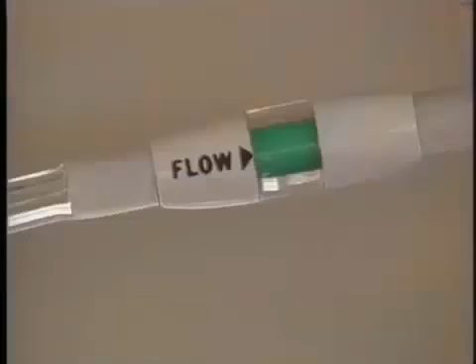The pre-flight inspection should also include a check of the system itself. This can be done by turning the oxygen system on and checking each outlet for flow.

Finally, brief your passengers on the use of oxygen and stress the importance of not smoking, since smoking poses a serious fire hazard.

If the oxygen system fails during a flight, or if oxygen is not used for high-altitude flights, you may suffer from hypoxia. Hypoxia is caused by a lack of oxygen.

Symptoms for hypoxia vary from one person to the next, but one of the first things to be affected is your judgment. Here is a list of the common symptoms.

Since hypoxia impairs judgment and may not be easily recognized, it is very important to take corrective action before hypoxia develops. The FAA recommends that oxygen be used above 10,000 feet during the day and as low as 5,000 feet at night.

A condition with similar symptoms to hypoxia, but from an entirely different cause, is hyperventilation. Hyperventilation is a deficiency of carbon dioxide, which causes a chemical imbalance in the bloodstream. Hyperventilation results from deep, rapid breathing, which is normally an involuntary reaction to stress, tension, anxiety, or fear.

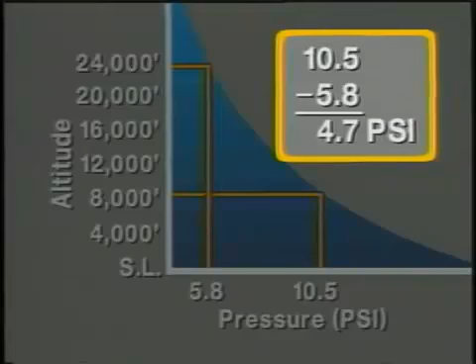A safety release valve is installed in the cabin. If cabin pressure approaches the design limits of the airplane, this valve opens to relieve the pressure. This valve can also be connected to the landing gear safety switch so that any time the gear is down and the switch is open, the cabin depressurizes. It may also be manually opened in case a turbocharger fails and contaminated air enters the cabin.

There are two types of pressurization systems, a basic system and a controllable system. All you have to do with a basic system is turn it on. When the airplane reaches a preset altitude, commonly 8,000 feet, it will begin to pressurize. As the airplane continues to climb, the cabin altitude will remain at 8,000 feet until a second preset altitude is reached. Past this point, which is commonly 24,000 feet, the cabin altitude increases as the airplane climbs.

A controllable system is more complex, but it allows flexibility and control that the basic system lacks. With a controllable system, the pilot can choose where pressurization begins. For instance, you can begin pressurizing the cabin at pattern altitude, and the cabin remains at that altitude until it reaches the maximum allowable pressure differential. Then, the outflow valve maintains this pressure differential as the aircraft climbs.

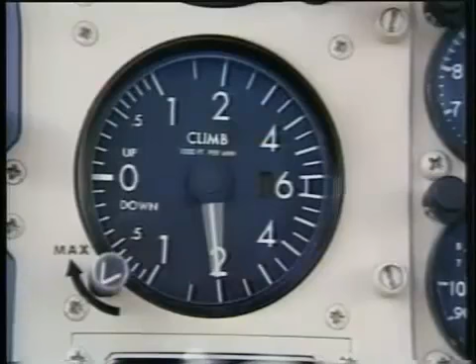The outflow valve in a controllable pressurization system can also be controlled to adjust the rate at which the cabin is pressurized or depressurized. This means the airplane can descend at 2,000 feet per minute to comply with ATC instructions. But to keep the passengers comfortable, the cabin pressure can be adjusted to descend at 500 feet per minute.

To increase the utility of an aircraft, it may be necessary to operate in conditions where icing is possible. While your primary goal is to avoid icing conditions, anti-ice and de-ice systems allow you to control or prevent icing to a certain degree.

To legally fly in known icing conditions, an aircraft has to be certified by the FAA for that type of operation. This certification includes installation of anti-icing and de-icing systems designed to keep the airframe, propellers, and windscreen free of ice. Let's take a closer look at some of these systems.

Anti-ice systems prevent ice formation, whereas de-ice systems are used to free the aircraft of ice that has already accumulated.

Probably the most common anti-icing device is the pitot heater. A heater coil of high-resistance metal is built into the pitot tube housing. When the switch in the cockpit is activated, the coil's high resistance causes it to heat up and prevent the formation of ice.

Many piston-powered aircraft have pneumatic airframe de-icing systems on the leading edges of wings and tail surfaces. Normally, this system consists of inflatable boots, engine-driven pressure and vacuum pumps, a timer, and pneumatic regulators. The engine-driven pressure pump inflates the boots, while the vacuum pump deflates the boots and supplies enough suction to keep the boots flat against the leading edge of the wing. The timer controls the inflation-deflation cycle.

Some propellers are protected against the formation of ice by coating the blade surface with alcohol, usually isopropyl alcohol. With this system, alcohol is sent to a slinger ring. Injector tubes on each blade pick up the alcohol from the slinger ring and direct it to the propeller blade.

Windshields may be protected with alcohol, but normally they are electrically heated. Tiny electric heating elements are laid in the windscreen or windshield panel to heat it up and melt any ice.

Before flight, anti-icing chemicals may be applied to the airframe, propellers, and windshield to lessen the chance of ice adhering to these parts. Used together with anti-icing and de-icing systems, these chemicals can be very effective. Of course, flight in icing conditions may be hazardous regardless of how your aircraft is equipped.

Before you enter areas of known icing, you should be sure that all of your systems are operating correctly and that you're familiar with the specific equipment installed on your aircraft. It's also a good idea to limit your exposure to icing conditions. Some of the systems described may handle ice better than others.

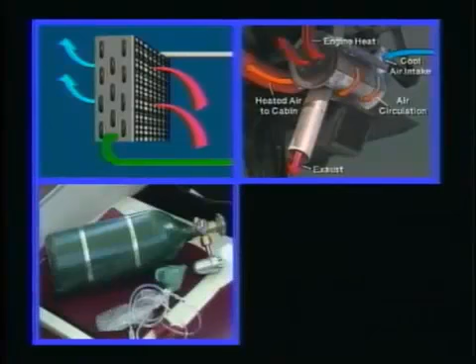The aircraft systems we have discussed in this section are designed to increase comfort and to allow you to adapt to an environment of reduced atmospheric pressure and oxygen levels, as well as the danger of structural icing. Thorough knowledge of the systems installed in your aircraft and good operational practices will lead to many enjoyable hours of flying.

Another system commonly found on high-performance aircraft is retractable landing gear. Retracting the gear streamlines the airplane and reduces parasite drag. This leaves more power available for better climb performance and higher cruise speeds.

There are many different types of retractable landing gear, from the types found on large commercial transports to those on high-performance single-engine aircraft, with each one being identified by the power source used to extend and retract the gear. In this section, we'll look at the most common types of retractable landing gear systems: the electrical and the hydraulic.

In both the electrical and hydraulic systems, you control the position of the gear by a landing gear lever located in the cockpit. By moving this lever, a signal is sent to the power source, which in turn supplies the necessary energy to raise or lower the gear.

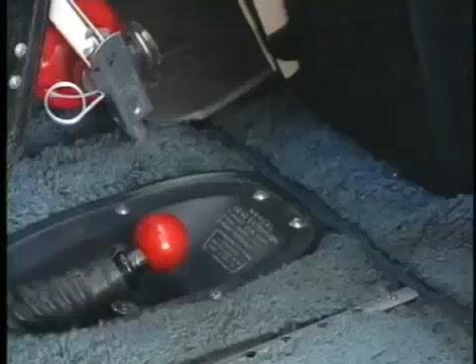This system also has an emergency feature should an engine or hydraulic pump fail. Backup hydraulic pressure can be supplied by an electrically driven hydraulic pump, or in the case of some small general aviation aircraft, by a hand pump.

In the unlikely event of a hydraulic leak or loss of hydraulic fluid, some aircraft have tanks of compressed air that may be used to blow the gear into the down and locked position.

Another type of retractable gear is the hydraulic system, which uses an electrically driven hydraulic pump. This system is referred to as an electro-hydraulic system. Pressure in one direction raises the gear and holds it in the up position, while pressure in the opposite direction lowers the landing gear.

Most hydraulic systems have an internal pressure switch, which automatically operates the hydraulic pump when system pressure falls below a specified range.

This pressure is supplied to hydraulic actuator cylinders, which are attached to the gear assembly. These cylinders do the actual raising and lowering of the gear. In some systems, the gear is held up with hydraulic pressure. However, some manufacturers also use hydraulically actuated uplocks to hold the main gear in the up and locked position. In addition to hydraulic pressure, some aircraft have a heavy-duty spring attached to the gear assembly to help extend the landing gear into the down and locked position.

To prevent inadvertent retraction of the gear during ground operations, most systems incorporate a mechanical squat switch located on the landing gear strut. When this switch is compressed by the weight of the aircraft, it does not allow the gear to retract. However, if the gear handle is in the up position and pressure is removed from the switch, the gear attempts to retract. This could be especially hazardous on takeoff.

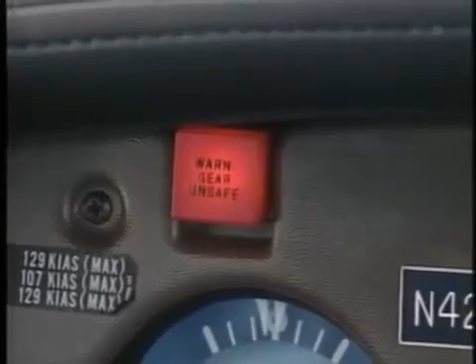To determine the status of the gear, indicator lights are installed. There can be one or more lights located near the gear handle. When the gear is down and locked, a green light appears. Gear in transit or in any other position besides down and locked may be indicated by an amber or red light.

In most aircraft, these lights can be dimmed. This prevents them from becoming a distraction during night flights. In this example, rotating the light itself reduces the brightness.

Some landing gear indicator lights have a push-to-test feature, so you can quickly determine if the bulb is burnt out. Another way to determine if a bulb is burnt out on systems with more than one light is to switch the bulb with one that is already illuminated. Most systems are set up so that all of the gear lights are interchangeable. In this way, you can quickly determine if the problem is in the lights or the gear itself.

Some aircraft also incorporate a small mirror to help you visually determine if the gear is down. Another feature found on most retractable gear aircraft is a landing gear warning system. This usually consists of a warning horn that sounds when the gear is not down and locked, and the throttle is reduced below a specific point. A similar system also alerts the pilot that the gear is not down and locked when the flaps are lowered beyond a specific flap setting.

The gear on some systems automatically extend when the airspeed drops below a designated value. This system also prevents the gear from retracting when below this airspeed. These auto-extension type safety features may be disarmed so the aircraft can be maneuvered with the gear up at slower speeds. For example, this system must be overridden in order to retract the gear during a maximum performance takeoff.

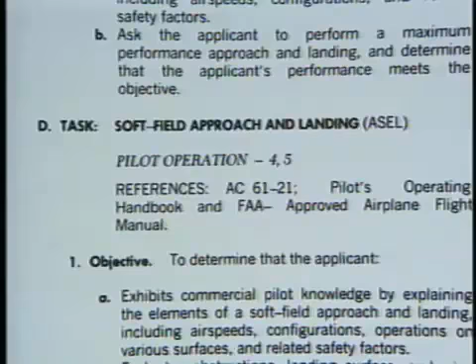In this program, we'll discuss short field operations, which are listed as maximum performance takeoffs and landings in the Commercial Pilot Practical Test Standards. We'll also look at how to perform soft field takeoffs and landings. While these maneuvers are practiced separately, there are times when you might need to combine the techniques.

The first maneuver we'll discuss is the short field takeoff and climb. For training purposes, if an actual obstacle doesn't exist, you should assume there is a 50-foot obstacle at the end of the runway. Make sure your airplane has the performance to take off under the existing conditions by checking the takeoff performance charts in the airplane's POH.

During your pre-takeoff check, set the flaps as recommended in the pilot's operating handbook. Before you attempt a short field takeoff, position the airplane as close to the approach end as possible and align it with the center line.

Hold the brakes and apply full power before releasing them. This procedure allows you to check engine performance before starting the takeoff roll. Maintain positive directional control by using nose wheel steering until the rudder becomes effective.

Allow the airplane to accelerate with the stabilator in a neutral position for minimum drag. When you reach the recommended liftoff speed, smoothly and positively rotate the airplane to an attitude which will achieve the best angle of climb airspeed, or the recommended climb speed.

Maintain this speed until the obstacle is cleared. Attitude control is very important during the rotation to minimize the ground roll and maximize climb performance.

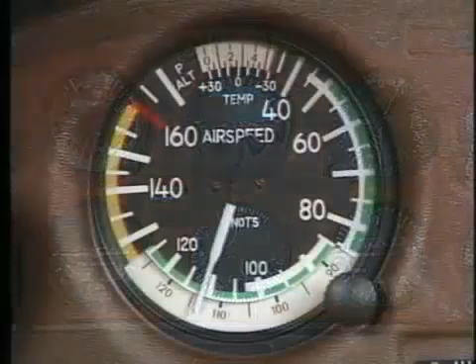Part of your preparation includes configuring the airplane at its maneuvering speed or the recommended entry speed. By remaining at or below this speed, you should not exceed the limit load factor. Once this is established, begin the maneuver by smoothly rolling into a 30-degree coordinated bank.

Then apply control wheel back pressure to increase your pitch attitude and add full power. During the first 90 degrees of turn, you're concentrating on maintaining the initial 30 degrees of bank while gradually increasing pitch so that maximum pitch attitude is attained precisely at the 90-degree point.

As you pass through the 90-degree point, concentrate on maintaining the nose-high attitude and slowly begin to roll out of the bank so that you reach a wings level attitude at the 180-degree point. When you roll out on the recovery heading, the airspeed should indicate just above stall speed. With practice, you'll learn to coordinate your rollout at a precise airspeed. Since full power is used throughout the maneuver, your airspeed is controlled by adjusting your pitch, which is the key to properly executing the chandelle.

You'll find that if you increase your pitch attitude too rapidly in the turn, the airplane may stall before you complete the 180-degree turn. On the other hand, if you increase pitch too slowly, you'll have excessive airspeed at the completion of the maneuver.

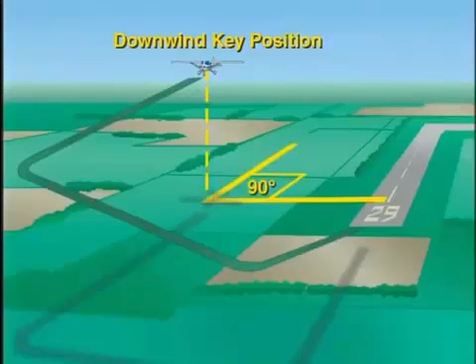While on downwind, select your point of intended landing. Once you reach the downwind key position, which is opposite the point of landing, reduce the power to idle, adjust the pitch to maintain altitude, and decrease airspeed to the manufacturer's recommended power-off glide speed, or, if no speed is given, 1.4 VSO. Then lower the nose to maintain that airspeed.

Your turn to the base leg of the pattern is governed by the existing wind conditions and glide angle. Stronger winds require a turn to base sooner than if lighter wind conditions prevail. Also, take into consideration the fact that strong headwinds affect your final approach as well. Use the turn to base leg to dissipate or conserve altitude as necessary to meet your intended landing position.

Once you arrive at the base leg key position, which is 45 degrees from the intended landing position, lower your flaps as necessary and retrim the aircraft to maintain best glide speed. The turn to final is timed so your rollout is aligned with the center line of the runway.

Your goal on final approach is to descend at an angle that allows you to reach the intended landing position at an airspeed that results in little or no float just prior to touchdown. Remember, in a power-off situation, the pitch attitude controls the airspeed, which in turn controls the glide of the aircraft. Lower the flaps as necessary and make small adjustments to the pitch attitude to control your glide angle and airspeed.

Your goal is to touch down within 200 feet of the point on the runway, but not before it, with little float. Do not attempt to stretch the glide or retract the flaps in order to make the landing point. Concentrate on making a safe landing, then re-evaluate your downwind and base locations and flap positions for the next power-off approach attempt.